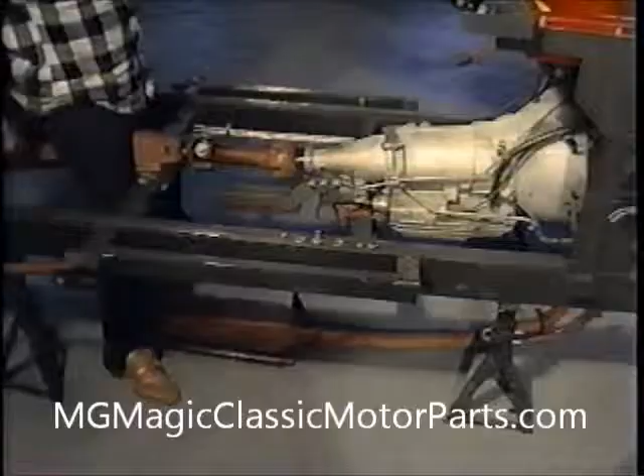Since the exhaust system we removed from our Chevette donor car was in like-new condition, we're able to modify it and use most of the pieces for our new car.

The bracket at the front of the catalytic converter is attached to the catalytic converter mount on the transmission with the original Chevette bolts.

At this point, we normally place a call to the Department of Motor Vehicles in the state our car will be registered. Through them, we are able to determine any emission control requirements we need to follow.

If our rear exhaust pipe were in poor condition, we would either fabricate a new pipe for the new muffler we'll be using, or when we had finished, we'd take our car to a muffler shop to have them fabricate the rear pipe for us.

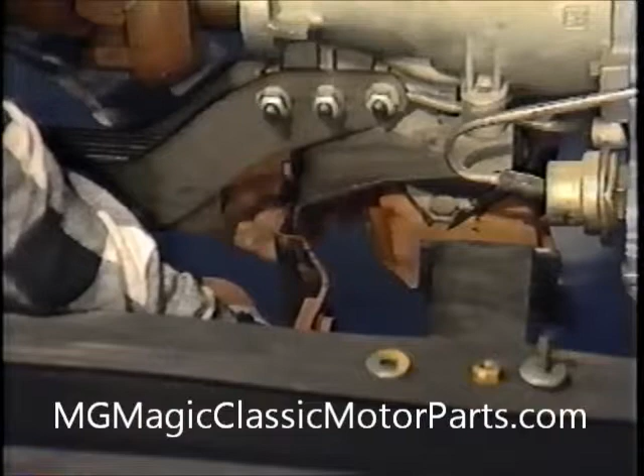We always make certain that the exhaust system is properly suspended from our chassis with rubber straps and that no part comes into contact with the frame or suspension.

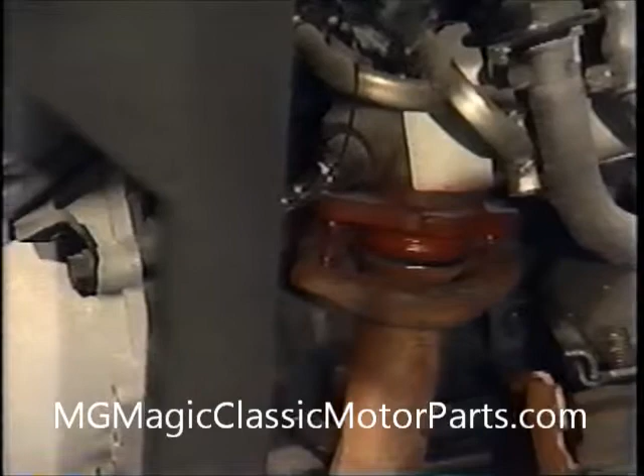At the side of the engine, the flange on the exhaust header pipe is secured to the studs from the exhaust manifold with the original nuts. We tighten them with the appropriate wrench.

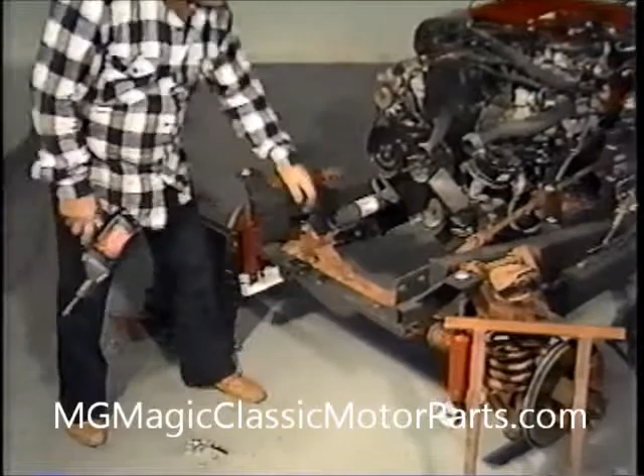Our MG-TD replica kit came with a new radiator bracket. After we have placed the bracket on the front cross member and centered it an equal distance from each side, we marked the hole locations with a China marker. Using an electric drill with a 3/8 inch bit, we drill the holes through the front and top surfaces.

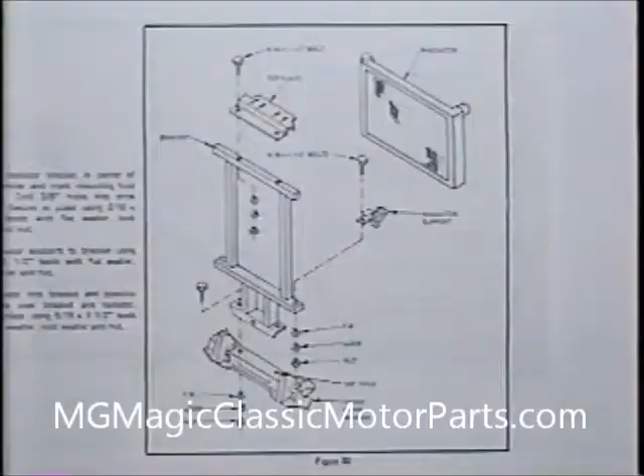We use 3 5/16 inch diameter by 1.5 inch long bolts. The appropriate socket and ratchet along with an open end or box wrench are used to tighten all bolts.

Once the radiator bracket has been installed, we place the lower radiator supports that we removed from our Chevette at each end.

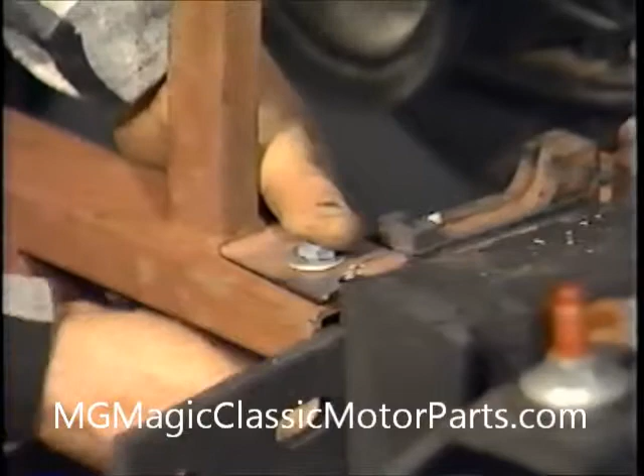After our holes have been drilled, we use 5/16 inch by 1.5 inch bolts with flat washers on both sides. A lock washer and a nut permanently attach them.

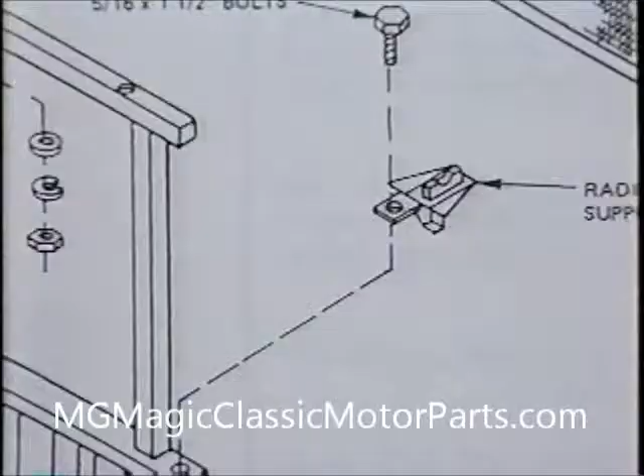Now that we've installed the radiator bracket, we can mount our radiator. After carefully placing the radiator into position on the lower supports, we place the upper radiator shroud into position on top of the radiator. 3 holes are marked on the top surface of the bracket using the shroud as a template.

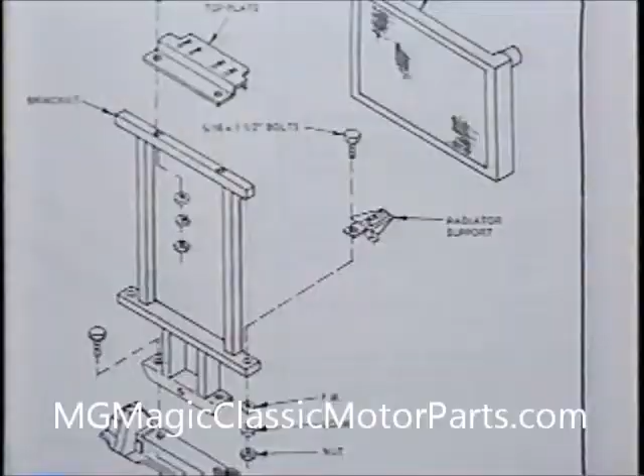The 3 holes are drilled through the bracket.

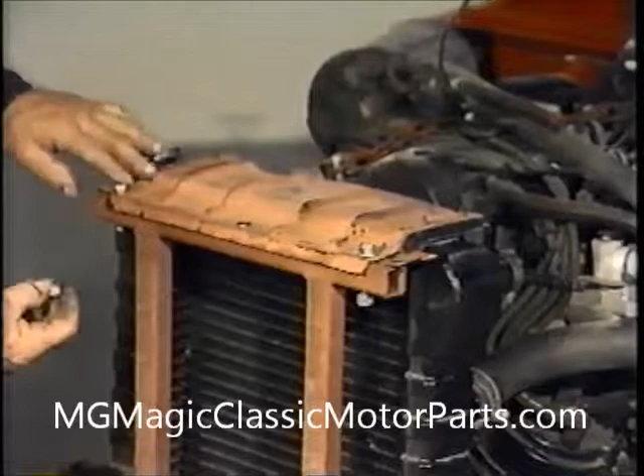We use 5/16 inch by 1.5 inch long bolts with flat washers, lock washers, and nuts to secure the shroud to the bracket.

Occasionally, we find Chevette radiators that require slight modifications. Sometimes the original unit may have been replaced in our donor car. When it has been installed, we connect new hoses along with the automatic transmission cooler lines.

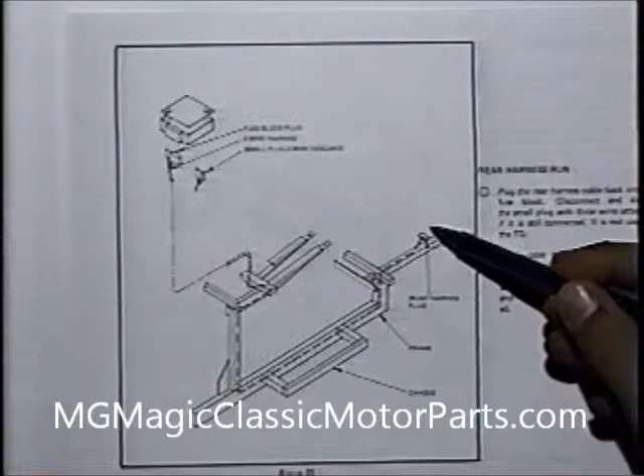While we won't be wiring the car right now, this is the ideal time for us to run the wiring harness as it is secured to the inside of the driver's side main frame rail. Following the illustrations in the instruction manual, we will secure this in position with metal clamps available from the electrical department of our local home center or hardware store.

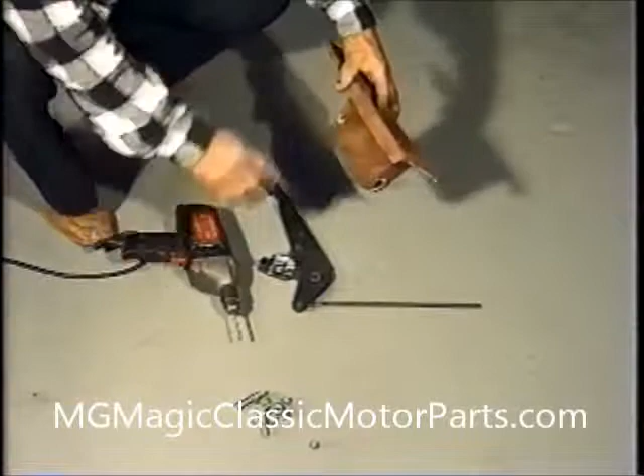The emergency brake lever is positioned against the side of the fiberglass emergency brake support housing that comes with the replica kit. A China marker is used to mark the mounting hole locations and the hole for the emergency brake rod at the rear of the housing.

Our electric drill along with a 3/8 inch bit is used to make the holes.

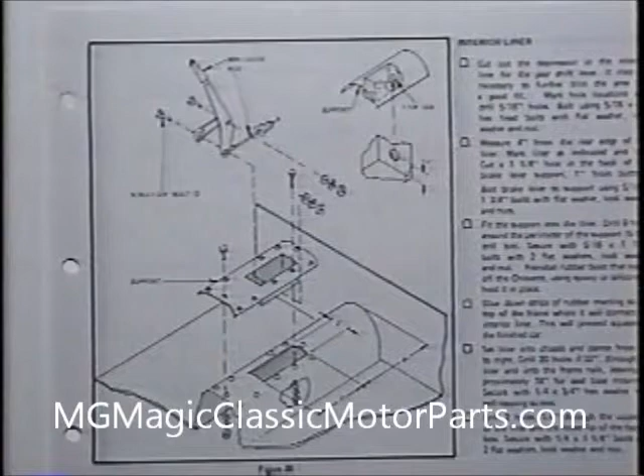At the rear, we use a rotary rasp available at our hardware store to enlarge the hole for the brake rod. Two 5/16 inch diameter by 1 3/4 inch long bolts with flat washers are used on both sides.

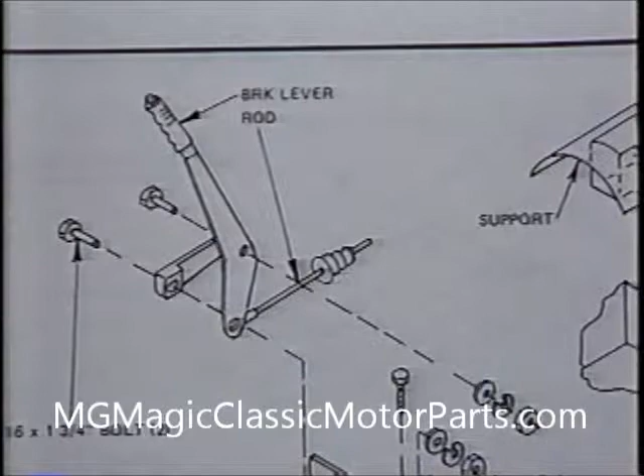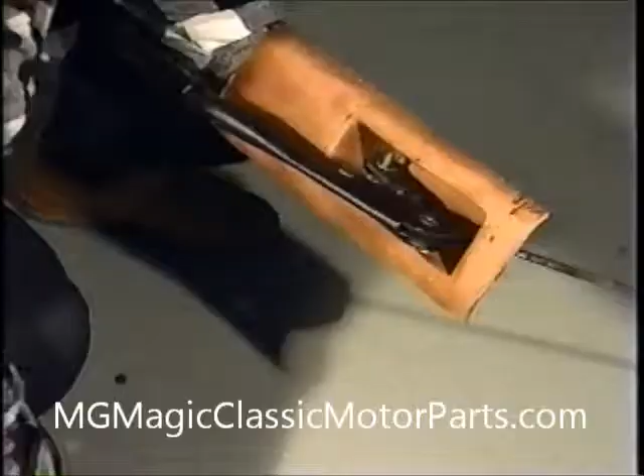Lock washers and nuts are used to secure the brake handle to the support housing. The completed assembly will be attached to our floor liner later.

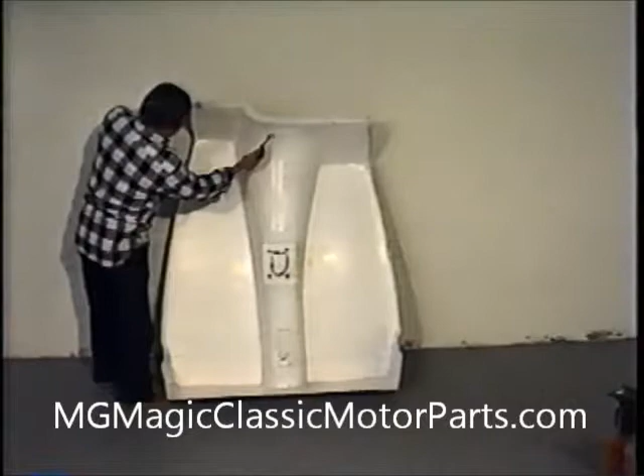Before we can install the floor liner to our replica, we must do some preliminary work. First, using a China marker or grease pencil, we mark a hole to the left side of the transmission tunnel for the speedometer cable. Moving toward the rear, we mark the holes for the shift lever and the scribed area that will be cut out.

A rectangular area for the emergency brake support housing is also marked.

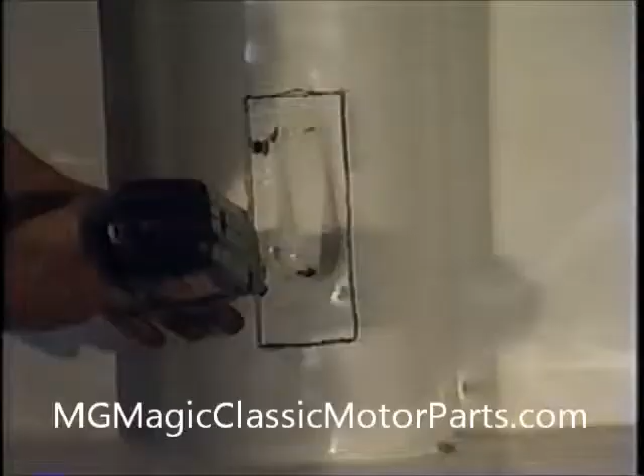Our electric drill along with a 3/8 inch bit is used to make pilot holes for the shift lever and emergency brake support cutouts.

Now we use our electric saber saw with the appropriate blade and cut the fiberglass that will be removed.

We place the Chevette shift lever assembly into the hole we've cut.

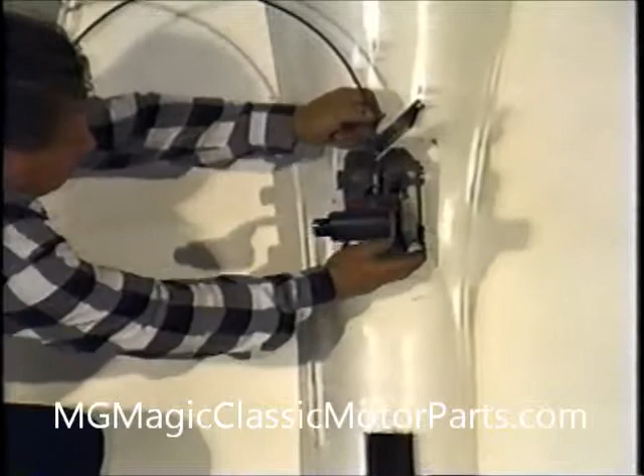Four 5/16 inch by 1 inch bolts are pushed through the mounting holes. Flat washers, lock washers, and nuts are used to attach them.

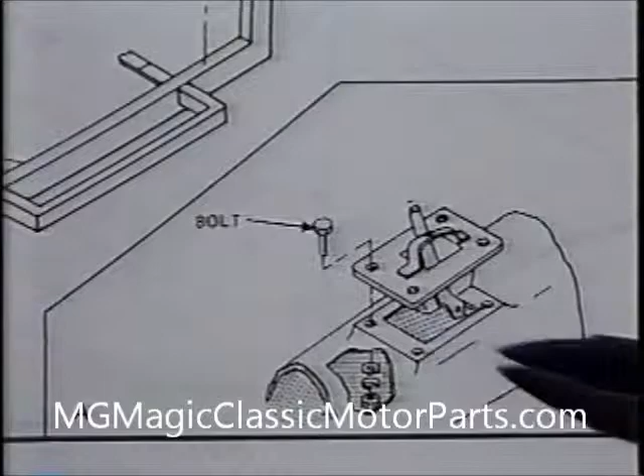Whenever we bolt anything to fiberglass, we always use a flat washer under any bolt head or nut that comes into contact with the fiberglass surface. This spreads any tension over a larger area. The correct tools are used to tighten the bolts.

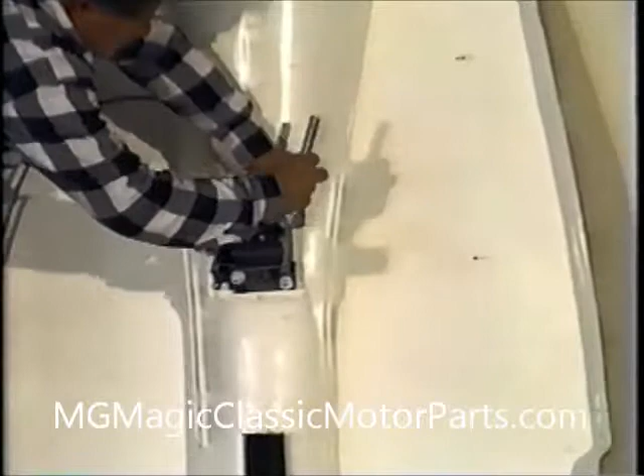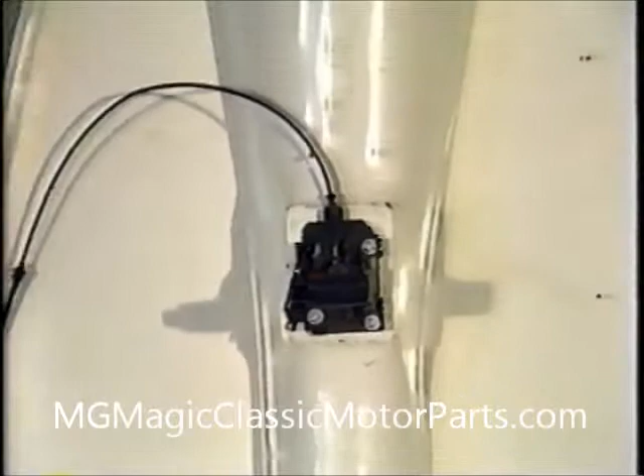Our floor liner is ready for installation.

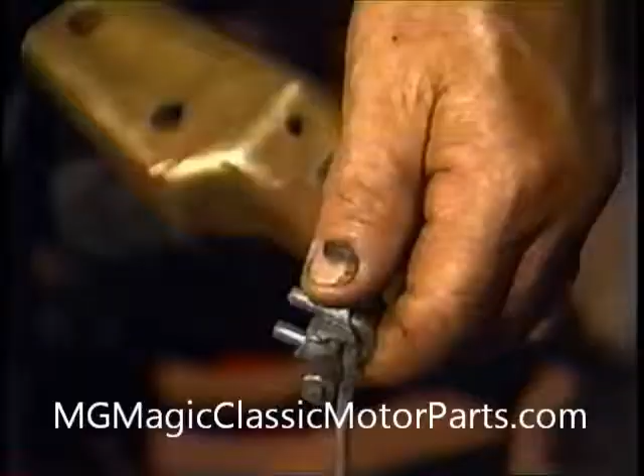Before we can install our new floor liner, we want to prepare the emergency brake cable. Two 1/8 inch wire rope clips are used to fasten the two cable ends together. At this point, we want only to partially tighten the nuts on the clips. They will be permanently tightened once the floor liner has been installed and the cable properly adjusted.

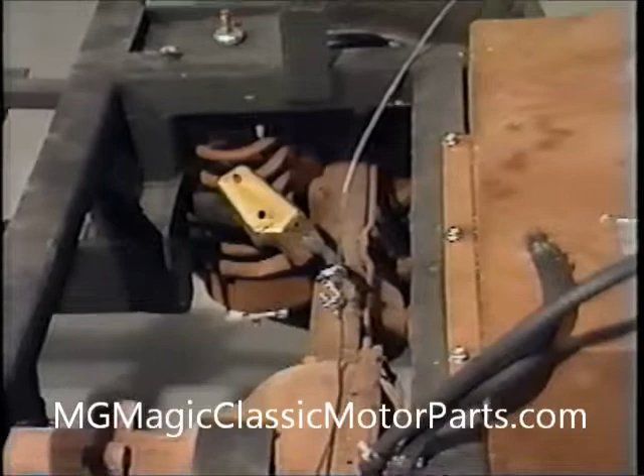The retaining clips that secure each side of the emergency brake cable to its mounting bracket are pried from the cable. The mounting brackets are then reversed and reattached.

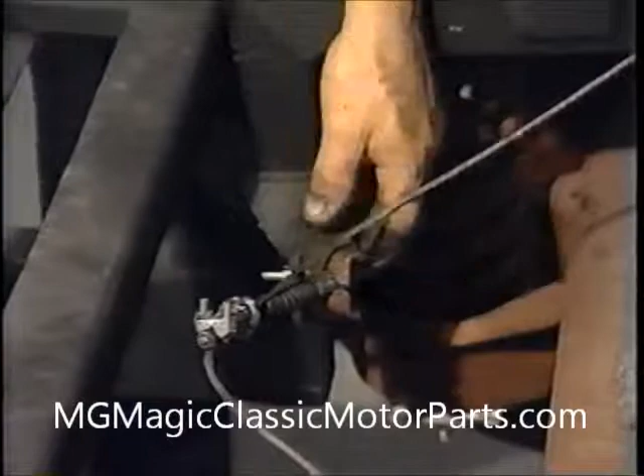Two 5/16 inch by 1 1/4 inch long bolts with flat washers, lock washers, and nuts are used to secure each bracket to the frame. The correct tools are used to tighten the bolts.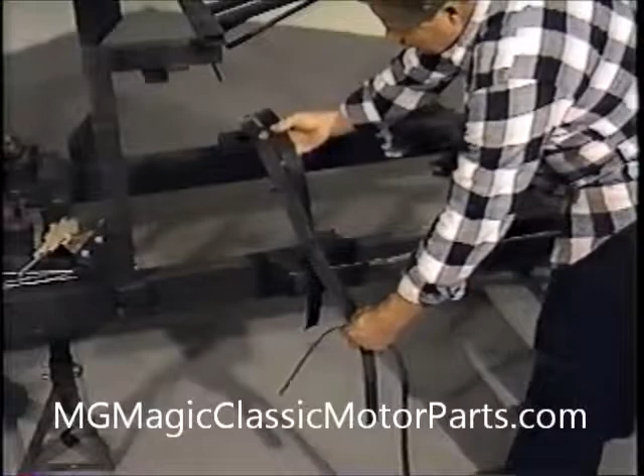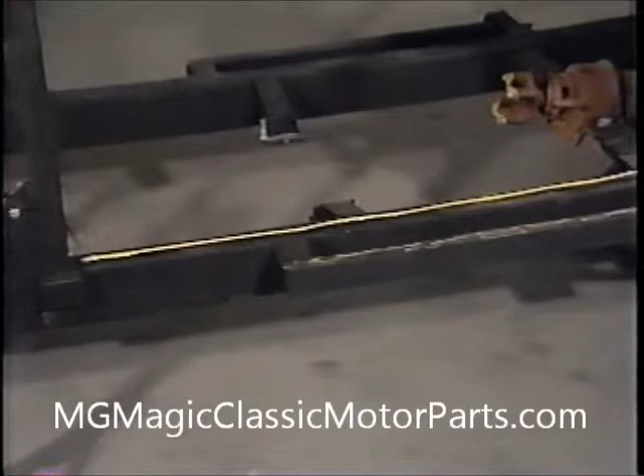Earlier, we obtained some rubber matting used for stairway tread from our local home center. The matting was cut into appropriate lengths and widths so that we were able to apply it to the surfaces of all frame members that come into contact with the floor liner. This will prevent any squeaks and rattles. 3M's 1300 rubber adhesive in a convenient tube was used to cement the matting to the chassis. We installed this earlier while waiting for some paint to dry.

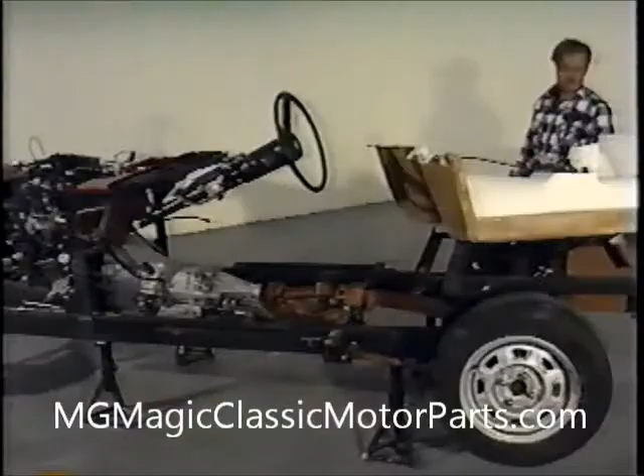At this point, installing the new floor liner is a simple procedure. We push it forward on top of the frame while elevating the rear so that the front lip slides under the brake pedal.

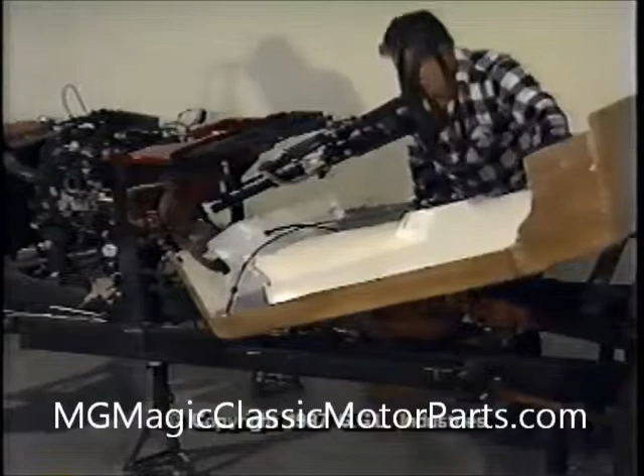The speedometer cable is passed through the hole on the transmission tunnel. A small notch was cut to clear the steering shaft. We push the liner down so it contacts the top of the frame. When necessary, we stand on the liner, using our weight to push it all the way down.

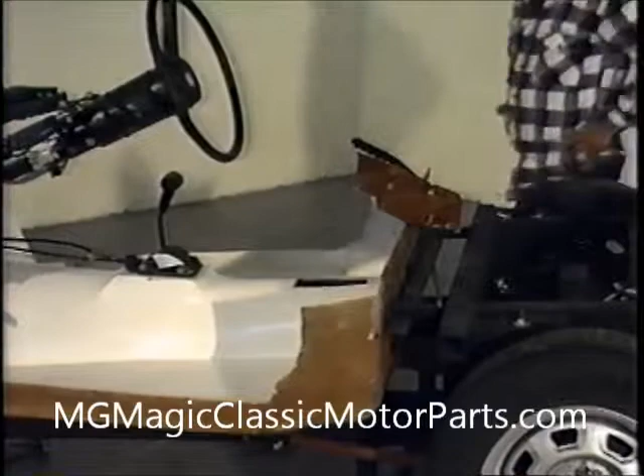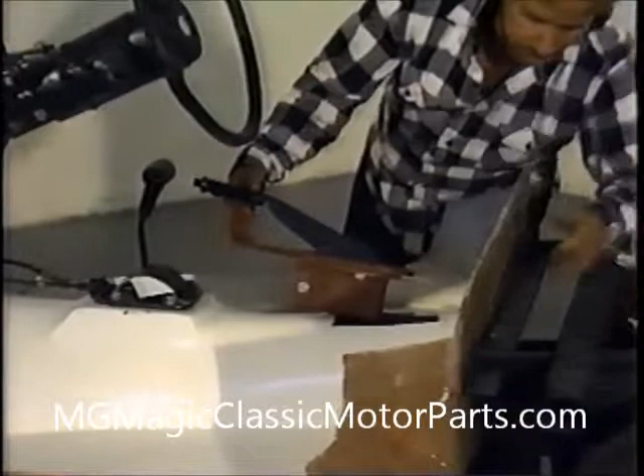Earlier, we had assembled the emergency brake lever into its support housing. The completed assembly is now placed in position through the cutout we made in the floor liner. The original Chevette equalizer bracket is attached to the emergency brake cable and then secured to the emergency brake rod.

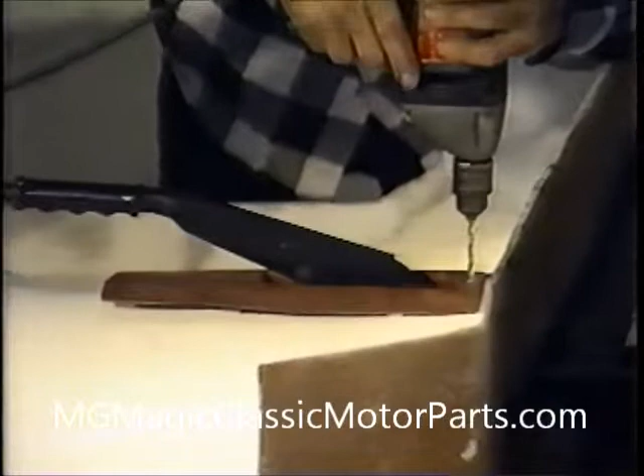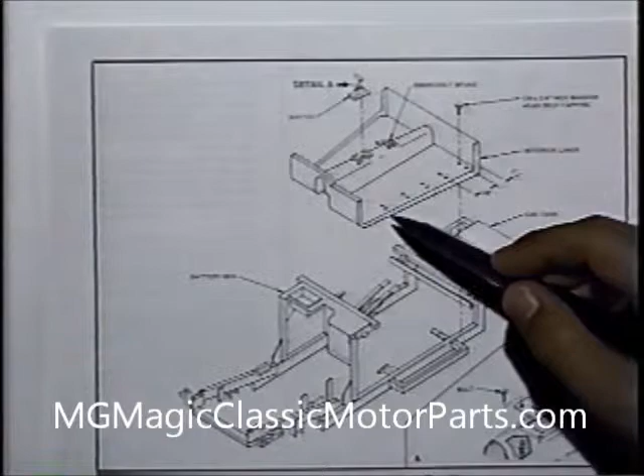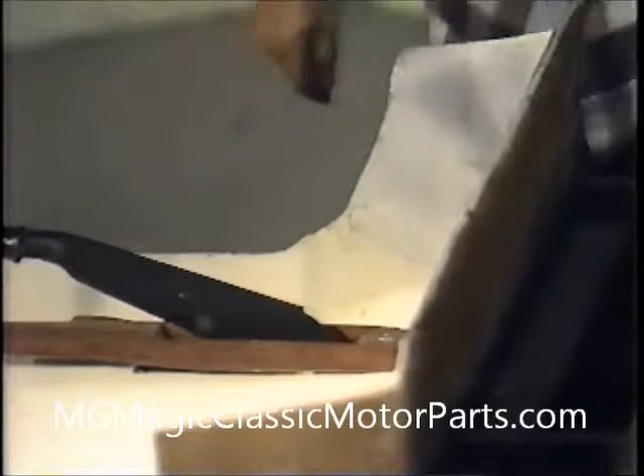Our electric drill with a 3/16 inch bit is used to drill holes through the support and floor liner. At the same time, referring to the instruction manual, we drill 20 holes through the floor liner and into the top of the frame. We then use either heavy pop rivets or 1/4 inch by 3/4 inch hex washer head screws to secure the floor to the frame. The emergency brake support is secured with either heavy rivets or 5/16 inch by 1 1/4 inch bolts with flat washers, lock washers, and nuts on both sides.

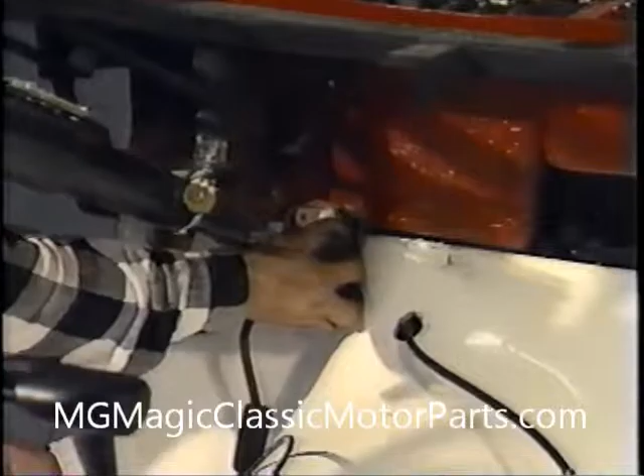After locating the accelerator pedal to the right of the steering column, where the floor liner meets the battery box, we drill 2 1/4 inch holes. The pedal location can be adjusted slightly for driver preference. If further adjustment is desired, we would simply bend the pedal arm to the desired position.

A 5/8 inch hole is drilled through the battery box, and the accelerator cable is passed through and snapped into place. Then we insert the cable into the notch in the end of the accelerator pedal, using the plastic retaining clip to hold it in place. When necessary, we can tie a small knot in the cable to remove any slack. The bolts are securely tightened, completing installation.

Well, our rolling chassis is complete. After we've lowered the rear, we place our floor jack under the front cross member, remove our jack stands, and lower the car slowly to the ground.

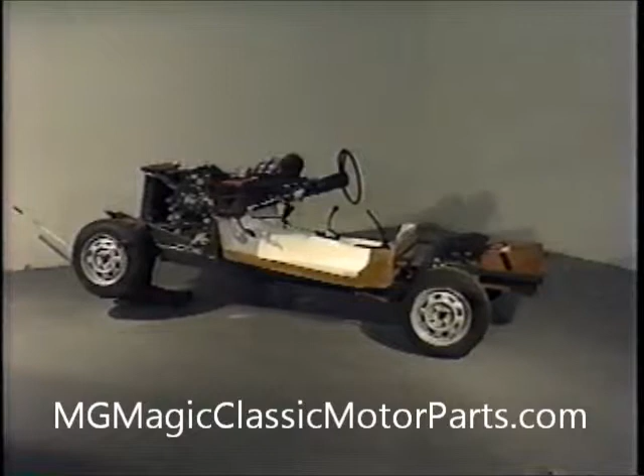The original Chevette tires and wheels have been retained and are used during assembly. When our new replica car is completed, we will mount custom wheels and new tires. At this point, our new chassis is ready for our MG body that we are preparing. It will slip right into place. A few electrical connections in the engine compartment would allow us to start the engine.

At this point, however, we're going to give the entire chassis a good coat of gloss black enamel paint. We prefer gloss enamel to a flat paint since it's easier to keep clean. We also find it's more durable.

We will remember to recheck everything and torque all necessary bolts to original factory specifications before driving the new car. Also, we will have the car thoroughly inspected, the front end aligned, and make any other necessary adjustments to meet all safety and emission requirements and standards before the car is driven. Now we'll take a moment to step back, look at our achievement, and know it is a job well done.